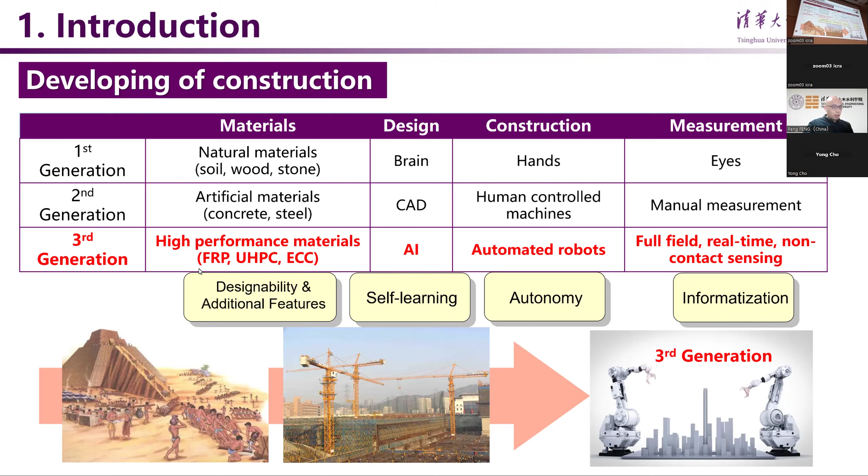But at the same time, I want to see the material and the structural system upgraded again to adapt to the new tools for design, for construction, for measurement. That is what I want to talk about.

Now we have some new robots for construction in China. For example, the plastering robot developed by Bozhilin can plaster 50 square meters in 1 hour. We even developed some huge building machines for high-rise buildings and bridges. But this robot is just for one procedure in construction, and the building machines for high-rise buildings and bridges are also controlled by human beings, so they are not really robots.

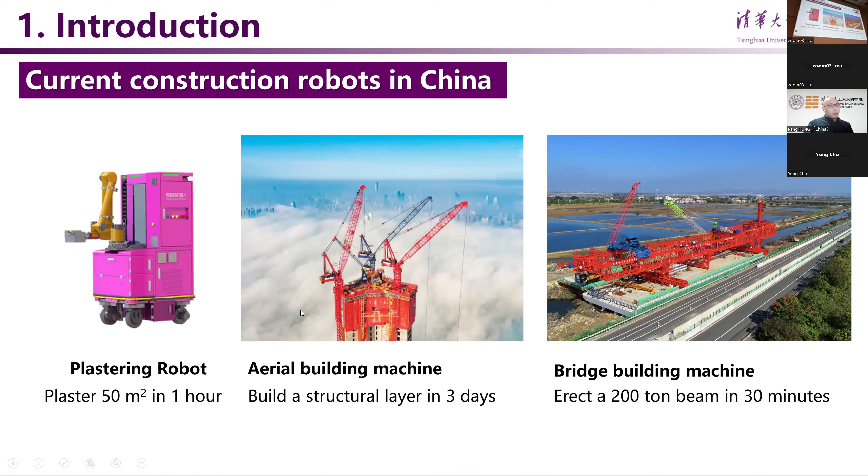But the advanced technology gave a lot of possibilities for structures. In the past 10 years, we built a lot of very complicated structures using advanced technology like 3D printing, CNC machines, and digital technologies. This is the opportunity of using robots, advanced manufacturing, and AI. They can make more complicated structures and very complicated configurations in buildings and bridges.

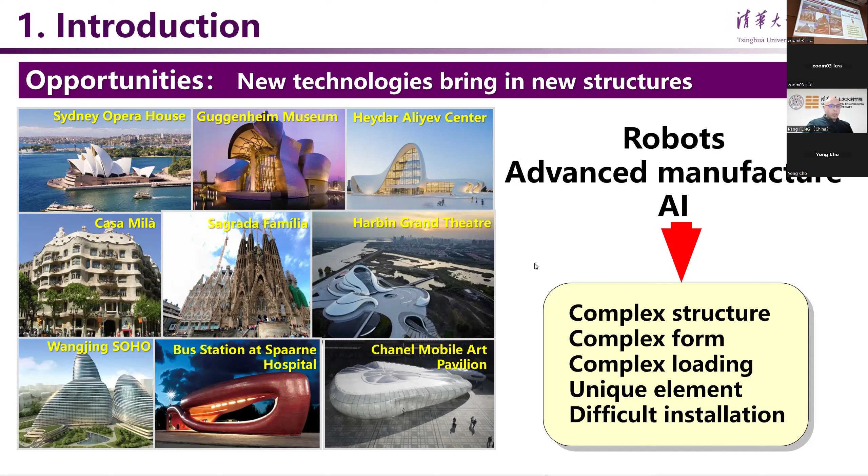On the other hand, robots and advanced technology can bring people to new construction sites, for example, the deep ocean, the polar regions, and even lunar construction. So what does it mean? It means that new technology like robots can change the structure and use new materials.

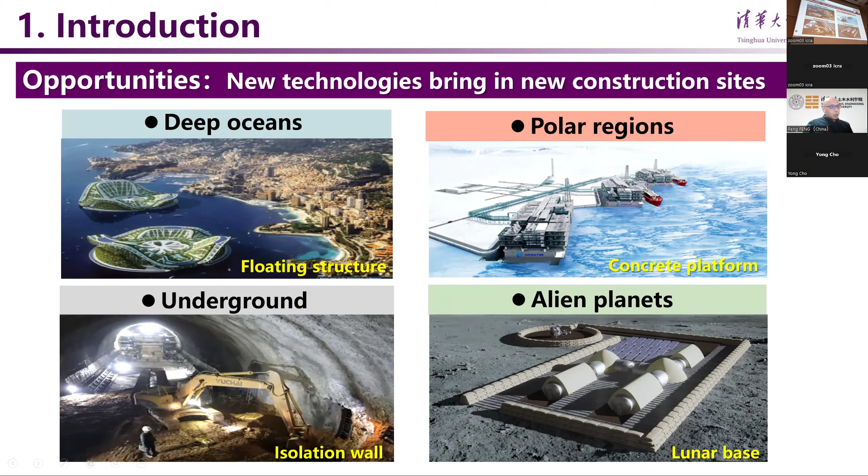But going back to current construction, there are two challenges from the real application of robots. One is the complexity of the construction task and the variability of the construction site. As Professor Nichols just mentioned, the whole construction is composed of thousands of procedures.

For example, just the structural components, like the roof, floor, and wall, their production process is composed of more than 100 procedures, more than 100 crafts. Each procedure is a complicated job, for example, assembling the rebar. Now we need professional workers to complete each craft, each procedure. If robots replace people to complete each craft, each procedure, that means we need 10,000 different robots. So this is a challenge.

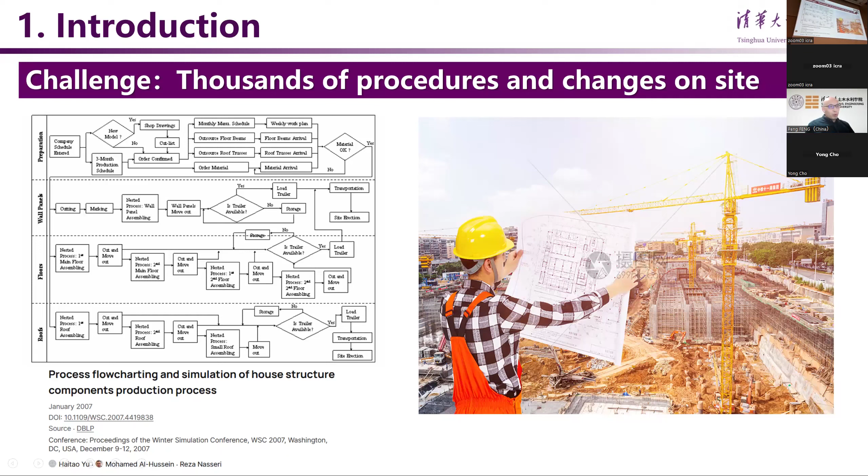And another challenge is the difference between the design and the real environment. Also consider the weather or something like this. So this is a challenge. So one thing we need to consider: we develop the advanced robots to serve the existing structure system, existing construction system.

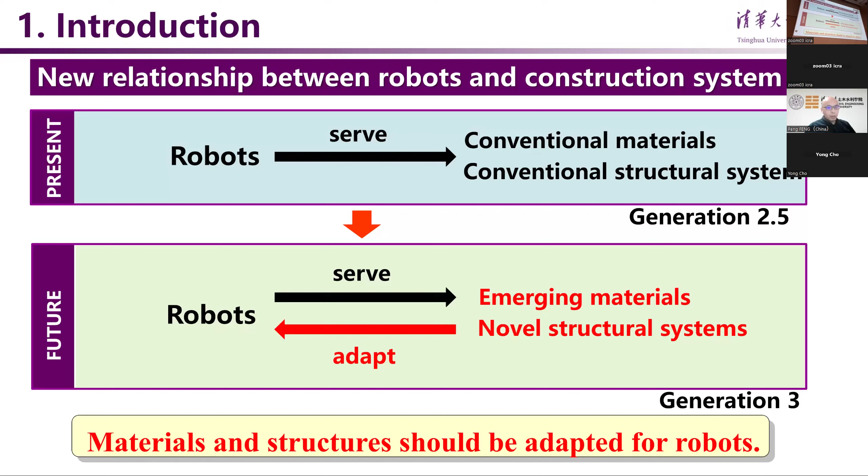This is just the 2.5 generation concept. So in future, the structure material and the structure system are developing also. So we need to consider developing the new material and the new system to adapt to the robots. That means that we want to achieve the third generation of civil engineering.

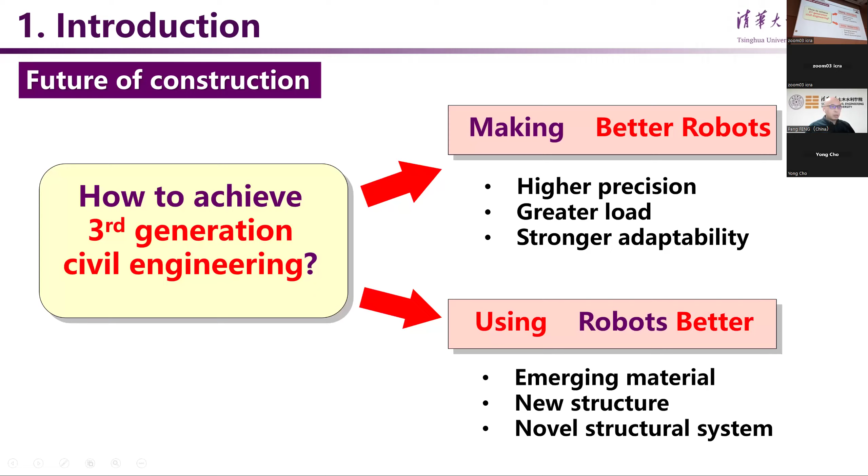One thing we are talking about in this workshop is more about how to make better robots, for example, higher precision, greater load capacity. Another thing we need to consider is how to use robots better to develop new materials and new structure systems. So this is the beginning of our study. So I will give some cases from this viewpoint. For example, the 3D printed concrete.

Why does 3D printing have many advantages? Because it is a good construction process technology suitable for the robot, because 3D printing does not need formwork. It does not need many different workers. We just need one robot machine and a pump for the cement. But for the real application of 3D printed concrete, we need to develop the new material.

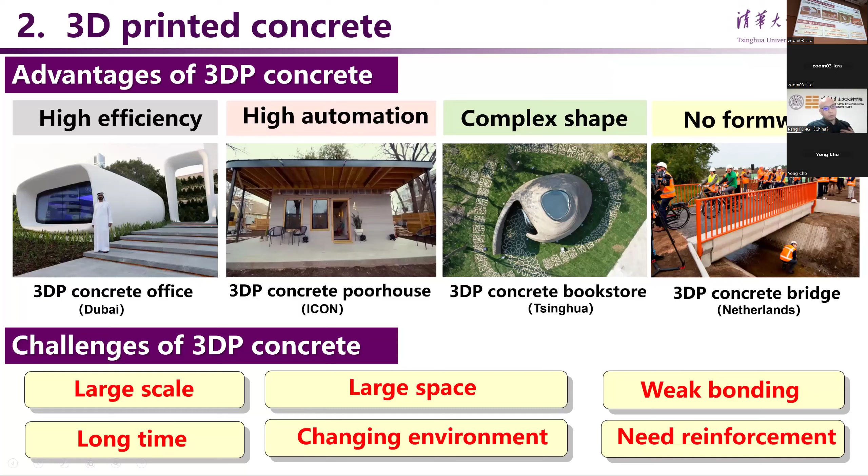The new material means that for printing concrete, we cannot use the traditional concrete with coarse aggregate. It cannot be printed very easily. And this is just the case for the material. For the structures, now in reinforced concrete we need steel rebar embedded in the concrete for the traditional concrete structure. But for 3D printing, the concrete wall is very weak in tension and without any reinforcement. So we need to develop some new method to adapt to the printed concrete structure members.

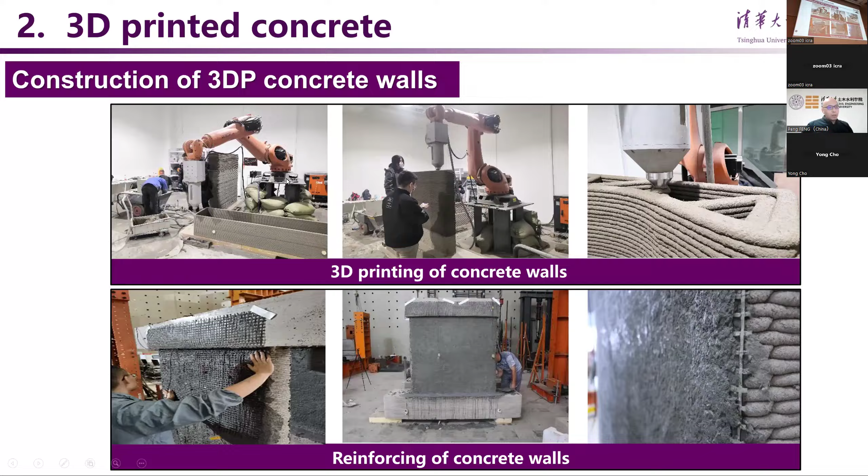So we developed the FRP. It's a kind of flexible fiber, carbon fiber, that can be adhesively bonded on the surface of the printed concrete. So this is just the case. We use the robot to print. It is very good. We don't need people to cast the concrete, but we need to develop the material and the system. So we use this system in the real application.

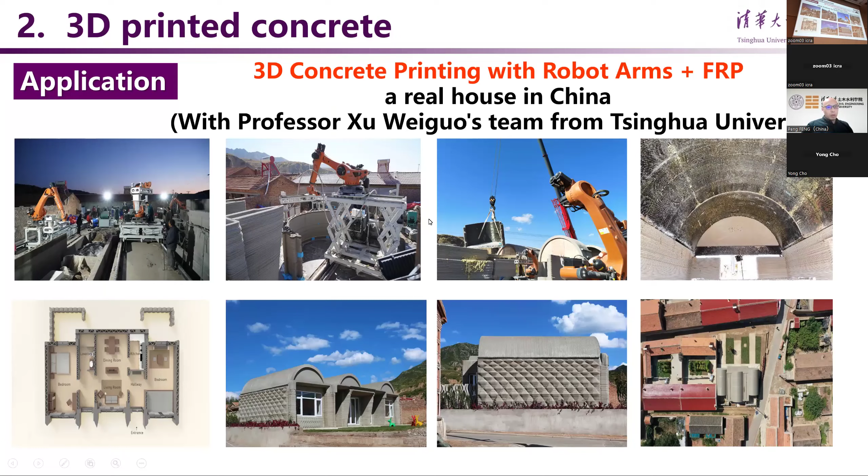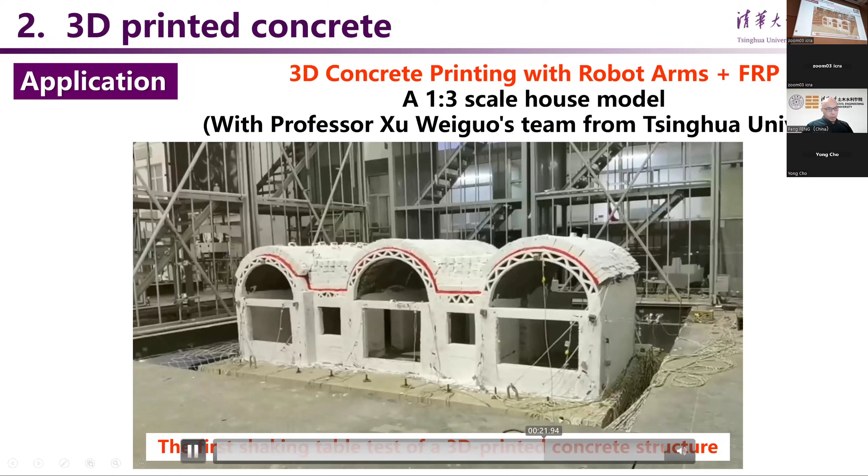This is a robotic arm, and we built a real house in a small village in Hebei province. And we used the new material, the new system and the new construction method using the robot arm. And we also used this method to make a model for a shaking table test to evaluate the behavior of the structure in an earthquake. This is just a case using robots for construction. At the same time, we use a new concrete, a new structure system.

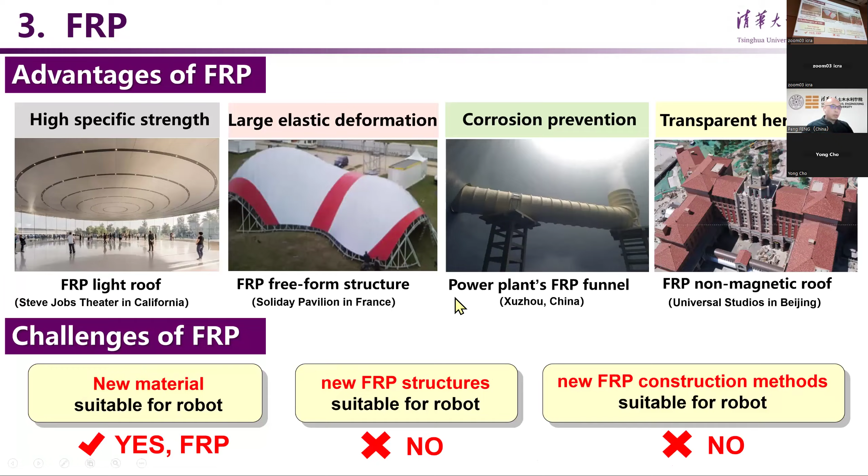And another case is the use of fiber reinforced polymer. Fiber reinforced polymer means carbon fiber or glass fiber reinforced epoxy resin or something like this. Why is this material more suitable for robots? Because it's very lightweight, much stronger than steel, and it is durable. But in most cases it is composed of very thin fibers. So that means during the construction, we need to put the fiber one by one.

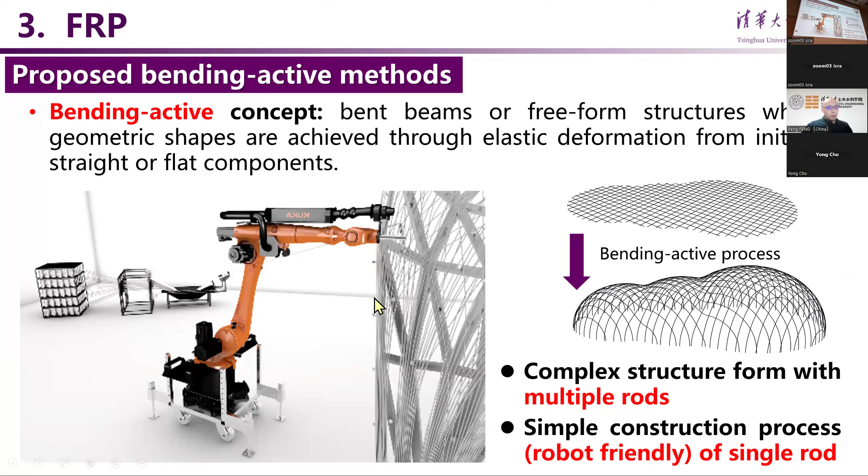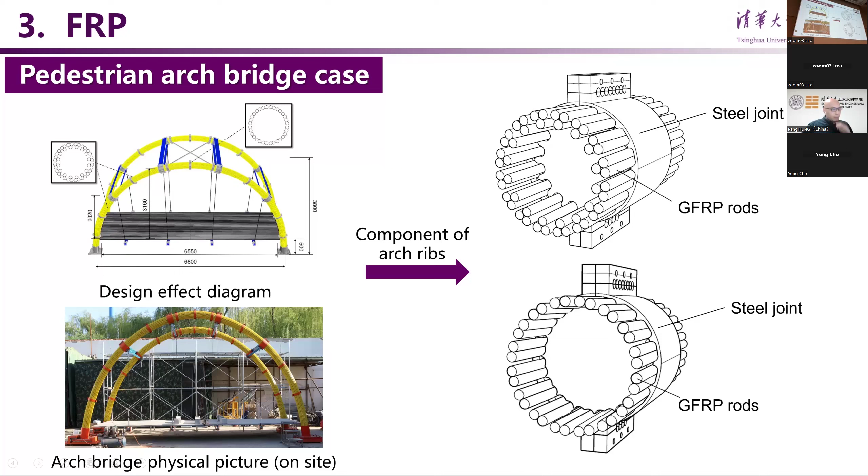If we use a traditional method to build this arch for a bridge, we just use the crane to build this arch in one time. But we use a robot. We use a very small bar of FRP, a GFRP rod, and use a robot to make it one by one. So this is another case. So using this method, we can make the structures using smaller components with a robot, but more components for one structure.

So we build this saddle-shaped curved spatial structure. We use more than 5,000 meters of FRP rod. So robots can very efficiently complete these very complicated structures using this method.

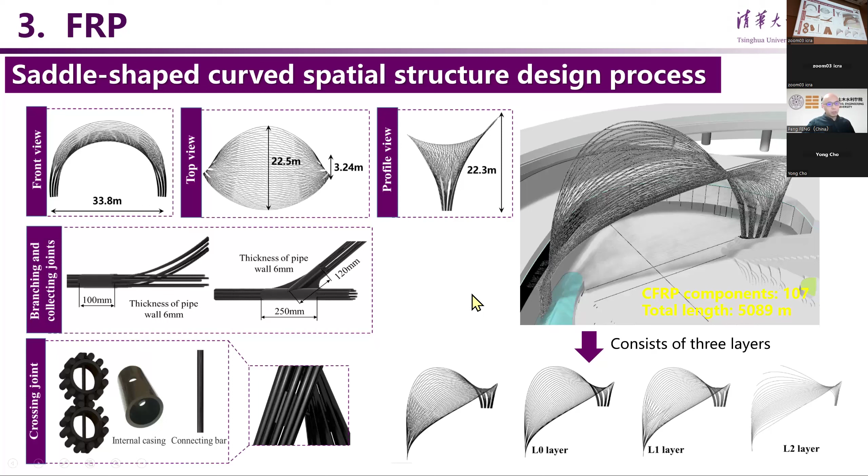And another case is masonry. Actually, we know masonry. We are familiar with traditional masonry. From the first generation to the second generation, why we use a block, why we use a brick: because people can lift the brick very easily by hand. During construction, we use the regular brick to make the structures. For the lightweight, it's very easy for the robot. It is suitable for robot construction.

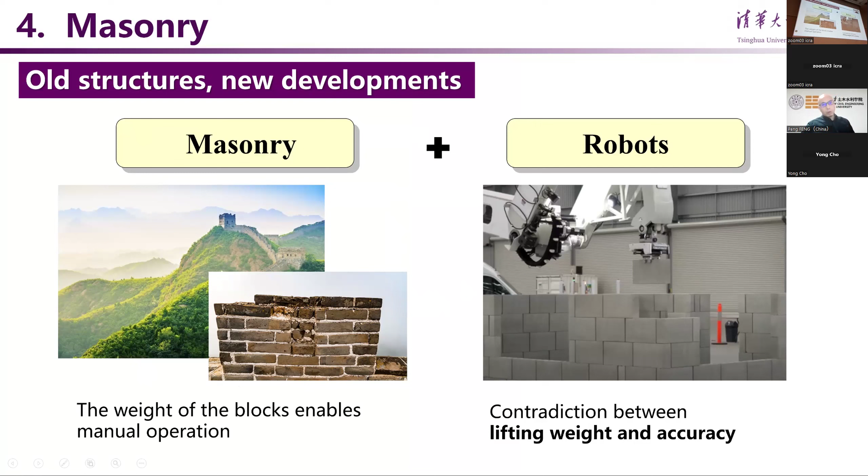But now we can upgrade the masonry structure based on the robot and 3D printing. We can use irregular blocks. For example, for this one we developed the interlocking design. That means we don't need the mortar between the blocks. It uses irregular blocks that interlock with each other, and it is very complicated for assembling by people, but it is easy for a robot.

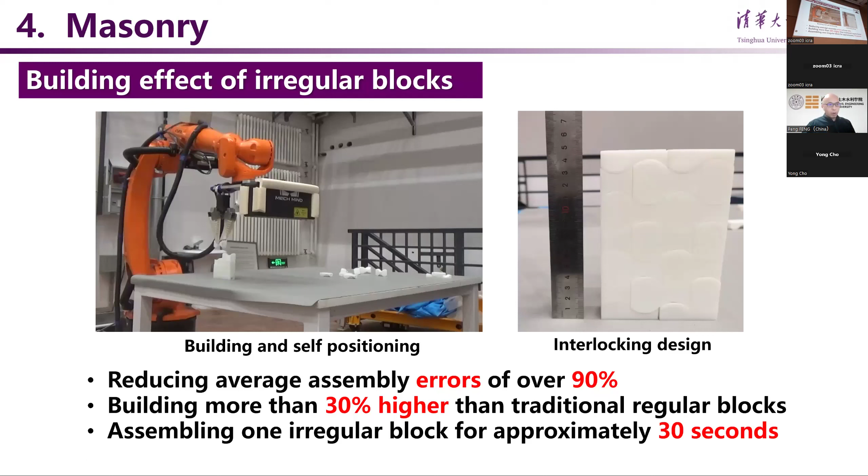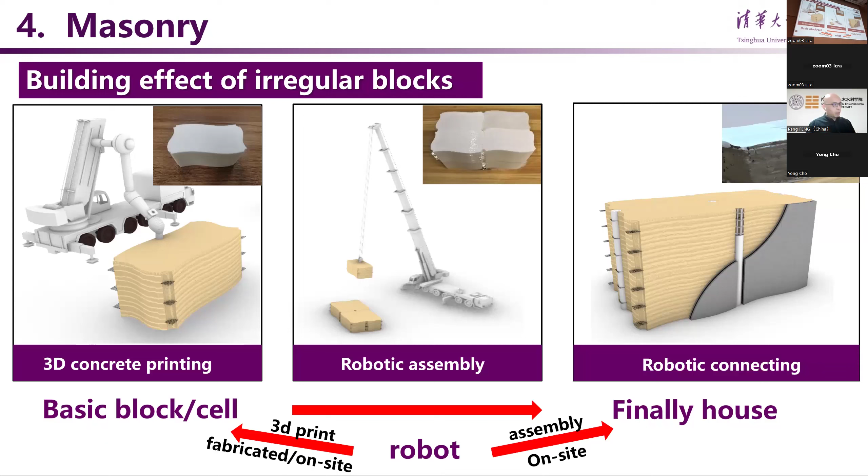So this is the basic concept. If we use a traditional method, we have to use a regular block, but we can use a robot to assemble the irregular block, and we can use a robot to make the irregular block with the 3D printing method. So this is a new system and a new material for robot construction. Okay, these are the 3 cases. We just want to give a new viewpoint on how to use robots for construction.

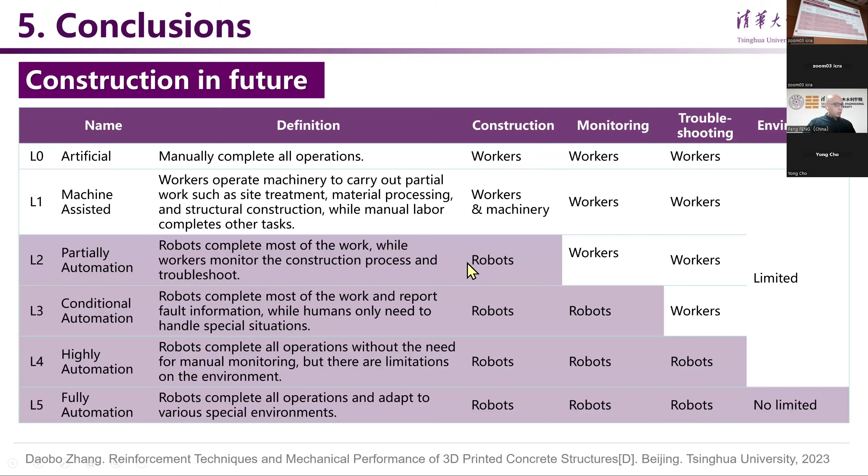Actually, in future, we can consider the 5 levels for automatic construction. We need to consider the construction. We need to consider the monitoring. We need to consider the troubleshooting. And now we are in level 2, I think, maybe moving on to level 3. But in future, we hope to realize a kind of scenario like this.

We can see a site, use laser scanning by the robot to automatically get the geometric information, and use AI to automatically design the architecture, get the shape and the function, and then design by AI, divided into irregular blocks with interlocking, then printed by the machine, and use the machine for onsite assembling, then make a structure. After it, we need intelligent detection and evaluation.

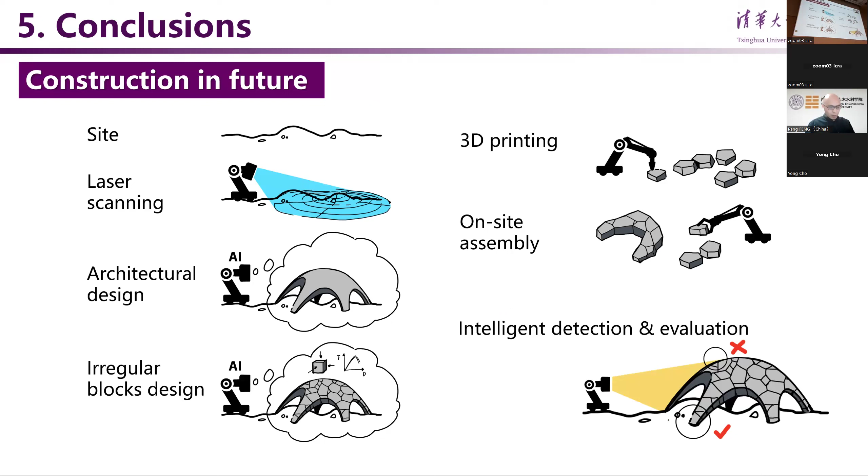Use the robot also. Now we just need a detection robot, AI for design, and 3D printing and assembling robots. We need 3 kinds of robots. So this uses a kind of masonry system. For all of the jobs, we don't need people involved in the system. Just the inspection is okay for people.

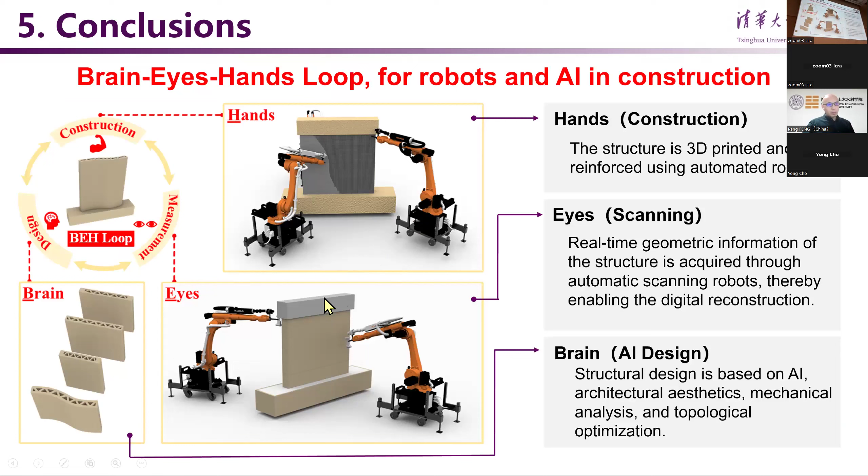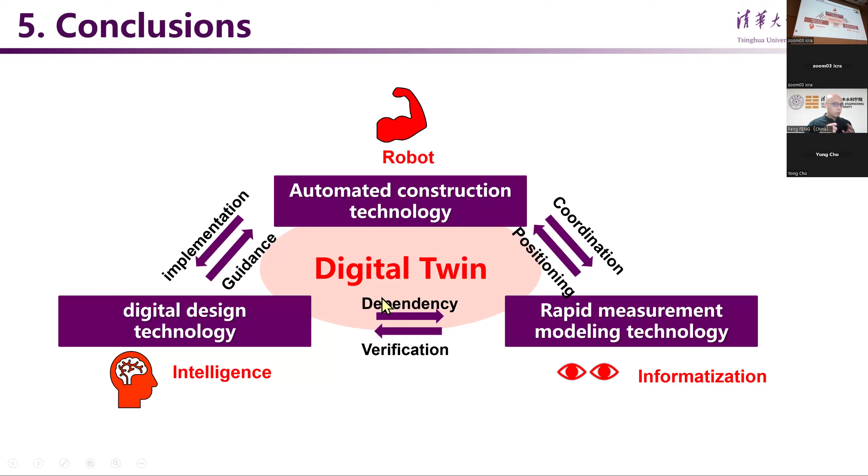And now we need to consider the brain, eyes, hands loop for the robots. In most cases, we just consider robots to replace the hand. We want to consider this loop integrated: the robot as a hand, sensors to help us sense the structures and get the information, and AI to design. So we need to combine them together with digital twins for structures. This is what we want to do in future.

Finally, in one word, the robot and AI can give new functions for construction tools. But finally, we want to get new buildings and new bridges. That means we don't want the traditional concrete or steel, the second-generation materials, to build the building and the bridge. Because we need the new life, we need new tools to build the new system.

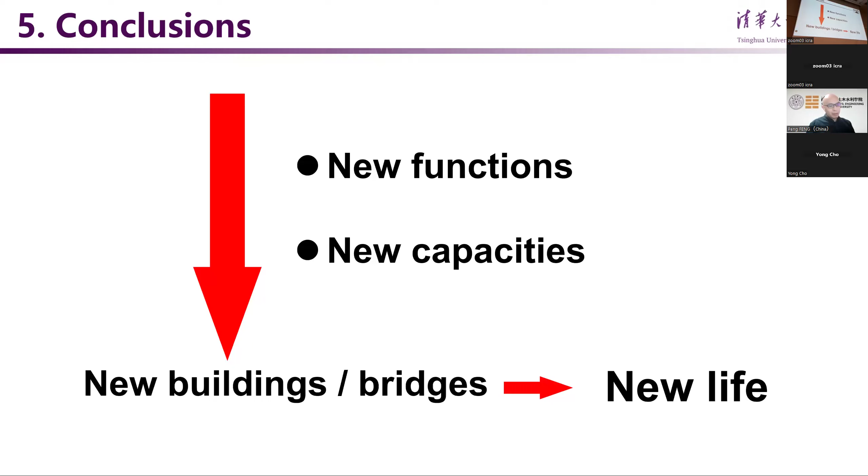So that is the main meaning of my presentation. Actually, I hope to collaborate with researchers developing robots together to make the next generation of construction and structures, buildings and bridges. That's all. Thank you.